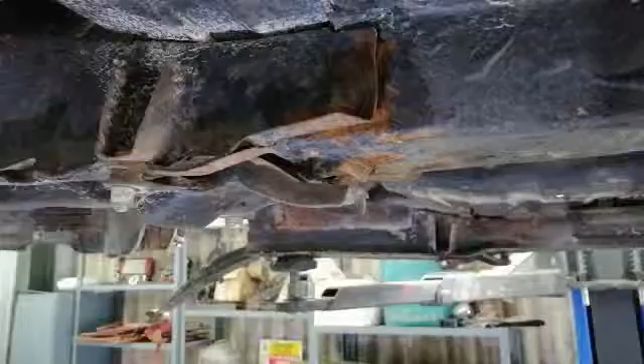So just regarding the dimensions that I've taken, I've actually put some paint marks on the chassis rails to reference, because I didn't have any hard points that I could work from, so I've just used some touch-up paint to mark references on the body, so I can take position longitudinally on the vehicle.

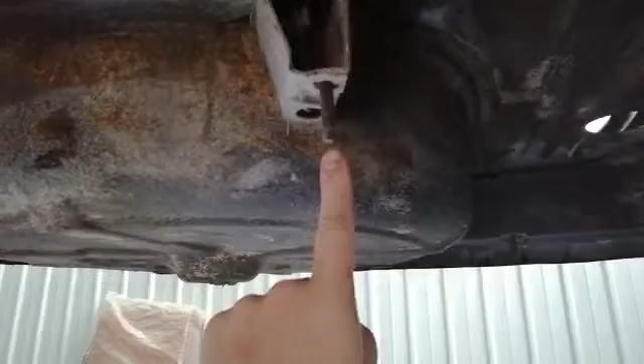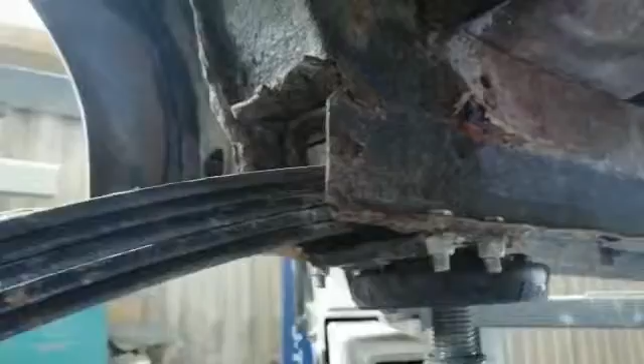I've also taken measurements to where the rear of the fuel tank mounts. So this is a diagonal relationship, so I've taken reference points diagonally to the faces of the spring hangers, because what I was finding is I could get very good references longitudinally, but I can't get any accurate reference left to right.

So I'm actually using this point here as a reference to measure to, noting that the shapes of the hangers are actually slightly different. So this is a square face, and this is chamfered. So I've taken the measurement point at the top there.

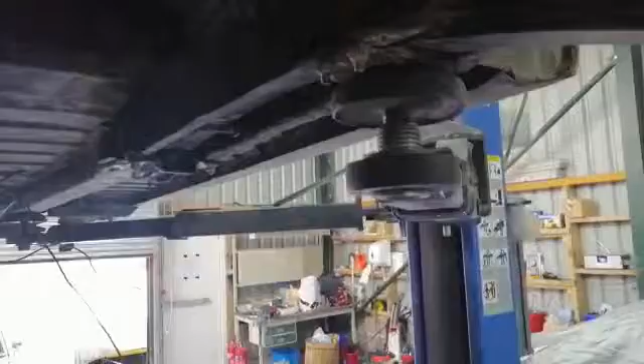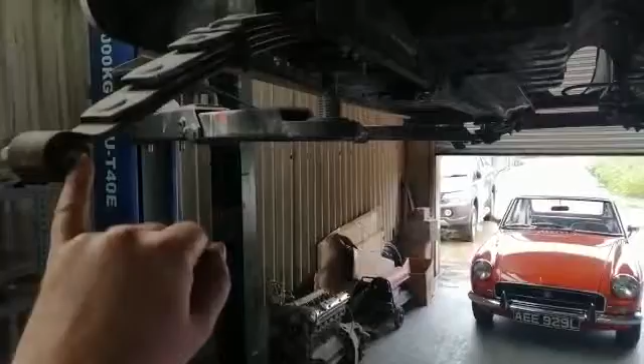In terms of height measurement, what I've also done is I've left the bolt in and just made sure it sat flush with the bushing, and measured between the two bolt faces as accurately as possible. So as I said, if I just do one side at a time, I replace the spring when I've tack welded in the section, I can ensure that I've got a very accurate lateral position on there.

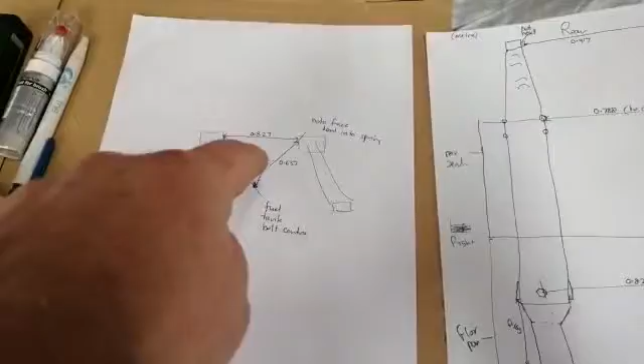And I'll just walk over to my scribbles. So I've actually done 3. So this is end on looking in. This is looking up effectively from under the car.

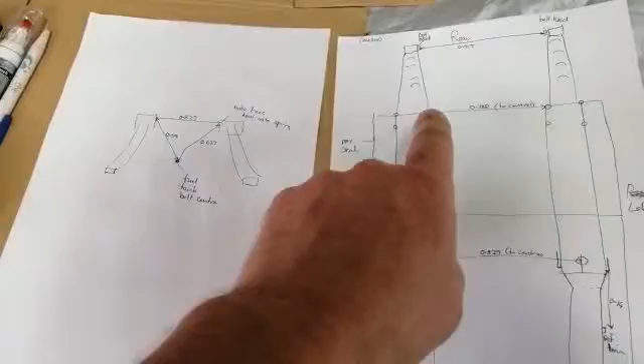So you can see that I've got the chassis rails here. The boot floor is indicated here. The seat base is here. And then the springs actually emerge here from the hangers. So I've taken as many points as I think I need to be able to check and get reference back.

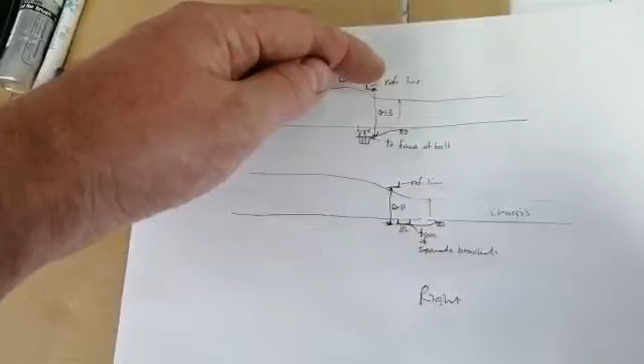And finally, just a very quick side-on one, just so that I've got reference to where the boot floor is. Again, I've put a reference paint line on the boot floor so that I can check the height of the face to the bolt. I just want to be certain, because that will affect the spring height. So I need to be careful with that one.